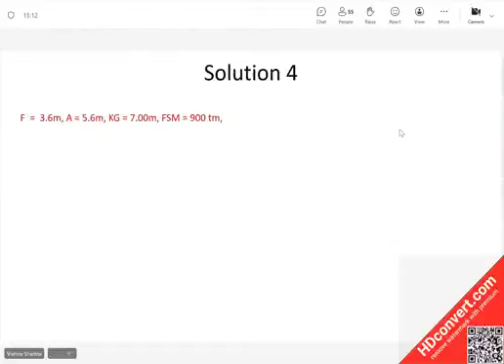Okay, so we'll first get the hydrostatic draft. We get it at 4.580. You can keep telling me the milestone results as we go.

Now, which particulars do we need to interpolate? Same particulars which were required in question number 3: W, TPC, LCF, and MCTC.

And we'll interpolate them. Why am I interpolating TPC? We used it in the last result, so I'm hoping it may be used in this question too. If it is not used, no issues, but be prepared that TPC may be required like we used in question number 3. So just to avoid going back to the tables if TPC is required, you can interpolate TPC and get the values. I'm sure all of you would have got these values, right?

Correct? Correct, sir. Yes, sir.

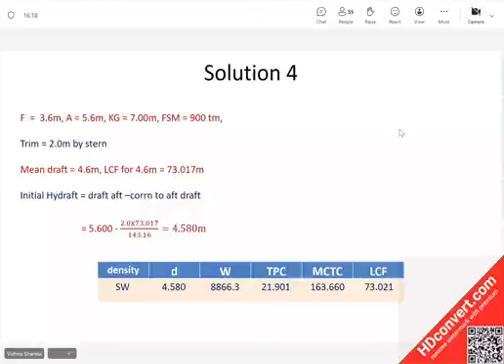Next, we will find out P at critical instant because we have to find draft at critical instant aft. So P at critical instant is 448.3 tons, correct? It's on display, am I right?

Correct. Yes, then we get W minus P and we get a draft of 4.375, right? This 4.375 in the table is the hydraft, the hydraft at critical instant. Now, since the vessel is on even keel, the trim is 0 at critical instant in this case. Therefore, draft aft shall also be 4.375.

What is our draft when the question is to be calculated? It is 4 meters aft. So that means the vessel will basically reach critical instant at a depth of 4.375 meters. Therefore, when the level drops any further to 4 meters, she is happily sitting on the blocks completely. Does everybody agree with it? Yes, sir. Okay.

So up to this time, the process was same as question number 3. But here the results are opposite to what you got in question number 3. In question number 3, you got the vessel within the critical period. In this one, you are getting the vessel outside the critical period.

Now, when the vessel is sitting overall... better mute, please. Mute, please.

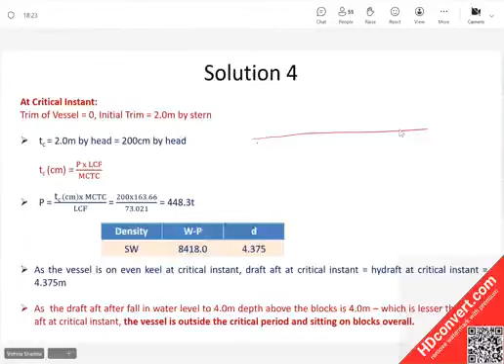So the vessel will be sitting at 4 meters on even keel condition. So the vessel would be sitting somewhat like this. Here are the blocks, and now the ship is sitting here on the blocks on even keel, and the depth of the water is now 4 meters.

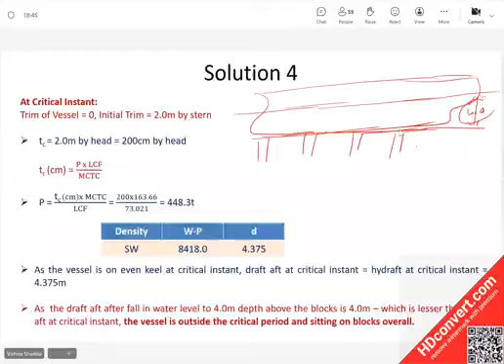At this point in time, you can get to know the buoyancy support, because this is the volume of water displaced. And if this is multiplied by density of the water it becomes the buoyancy, and that will be equal to displacement at 4 meters. Am I right? Yes or no? Displacement at 4 meters will be the buoyancy support to the vessel.

Please let me know if you have any problems comprehending it. Please let me know, class. The displacement at 4 meters picked up from the hydrostatic tables will be the buoyancy support available to the ship at that time. Yes or no? Am I right? Yes, sir, correct.

Because the draft is there, 4 meters, whatever displacement will be there. Now that is not the ship's displacement, mind you, but we are using that displacement to get the buoyancy support. And we know the displacement of the ship. Now, when we say displacement of the ship, in dry docking there will be only one displacement, and that is the actual displacement of the ship.

W will be used only for the ship's displacement. If you have to find this displacement, actually this will be W minus P, but if you don't agree it's W minus P, you can write it like this. But only W will be the displacement of the ship. Am I clear? Is that clear? Right, guys? Yes, so you know the displacement of the ship.

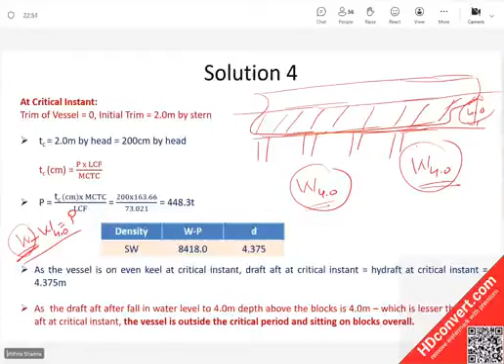Wow, wow, wow. If in a bucket you put a stone which goes and sits at the bottom, will it not displace any water? In a bucket, if you put a stone which goes and touches the bottom, will it not displace water? Is that what you're trying to say? Then everything has to displace—unless it is in vacuum, it has to displace the medium in which it exists. You and me are displacing the air in which we are sitting. And if 4 meters of the ship is submerged in the water, will that not displace the water?

Okay sir, I was thinking that she is sitting on the blocks and... No, so she is sitting. Is some part of the ship submerged in the water, yes or no? She is very much sitting. It is not that you are thinking wrong—you are thinking correctly, she is sitting on the blocks.

Now the stone is sitting on the bottom of the bucket—is the stone displacing water, yes or no? Tell me that. Yes, sir, yes.

So just sitting at the bottom, or sitting on the blocks, the ship is not displacing water if some part of it is submerged in the water, beta? Tell me, Inder. Yes, sir, she is displaced. Okay sir, how much?

What to what? Answer my question. No, to what draft is the vessel submerged in water? 4 meters, yes or no? 4 meters, yes sir. So she is submerged, that means that much water it will displace. Am I right? Yes sir, okay sir.

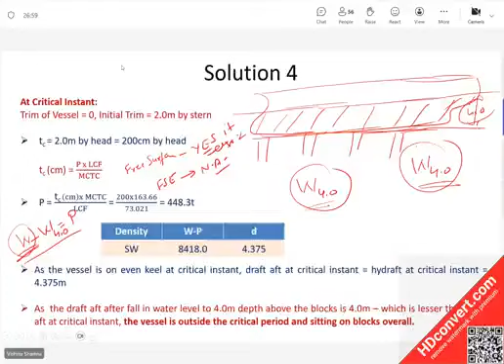This is only for explanation, we have done it yesterday. The hydrostatic draft of the vessel when the water level falls will be 4 meters above the block. Why? Because she is sitting on even keel, so hydrostatic draft will be the same as 4 meters.

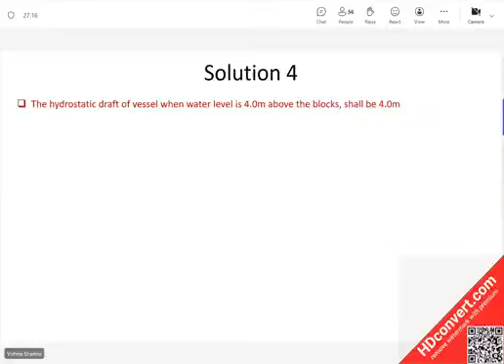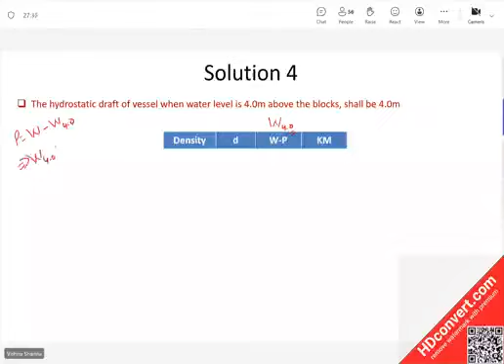So we get this displacement - this is displacement at 4 meters, you see. Or don't write only displacement, you can write W minus P, because your P is nothing but displacement minus displacement at 4 meters. This implies displacement at 4 meters is nothing but W minus P. Correct, beta? Am I right? And that is why this W minus P has been used here.

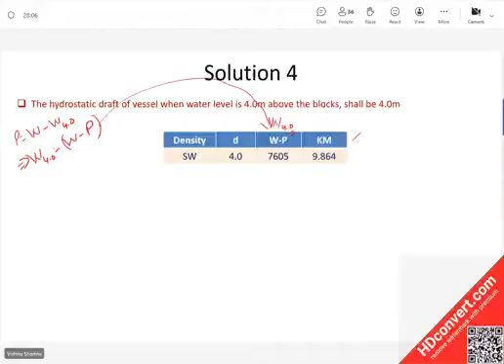Correct, beta? Understood? Yes sir. And yes, we'll need the KM for W minus P. So might as well, when you go to the hydrostatic particulars, get the KM also. At 4 meters, the displacement of the ship, which will be the buoyancy support, is 7605, which is W minus P. And KM is 9.864.

So we get the P of the vessel - don't use the word initial displacement, just use the word displacement of the ship and displacement at 4 meters, okay? There is nothing like initial displacement. Displacement of the ship does not actually change - it's a virtual change which is taking place, right? So just ignore this word here.

It's W minus W at 4 meters. So 1261.3 tons is the P here. And when you subtract 1261.3 from 8866.3, you'll again get 7605, which is W minus P. And once you get the KM, then you are good to get the final answer.

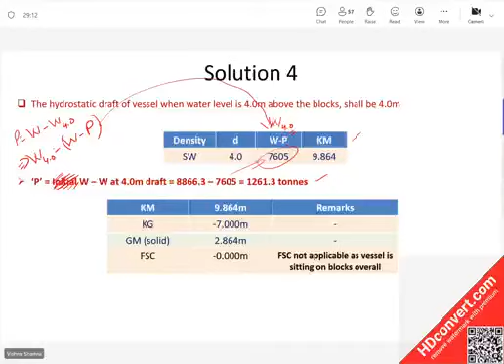KM for W minus P, KG 7 meters, GM solid 2.864. Don't remove free surface from the table, don't remove it. Free surface 0 - in remarks I have put FSC not applicable as the vessel is sitting on the blocks overall. GM fluid same as 2.864. Virtual loss: P into KG upon W minus P, and we get the virtual GM of 1.703.

Please have a good look at this question. Do it by yourself, let me know if anything is still not clicking with you. I give you another 2 minutes now to absorb this, understand this. Hold your doubts for 2 minutes so that others are not distracted. 2 minutes down the line, I'll ask you if there are any doubts and I'll address them.

Since you had already done up to that point, this is the last part you have to do, that's all.

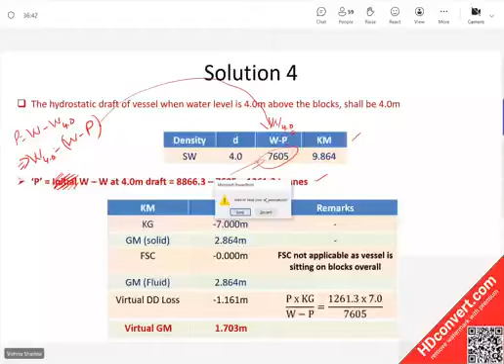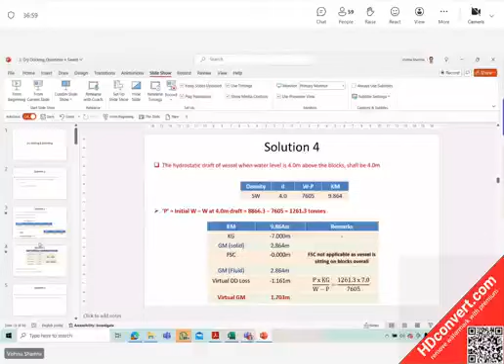Sir, in place of initial, what we can write, sir? Displacement of the ship. W, yeah, W is the displacement of the ship. There is nothing like initial and final. There is no change in actual displacement, na? Or is there a change? No, there is no change, sir.

So I've been calling it a ship's displacement so many times. W is the ship's displacement, right? Yes, sir. Okay, right. If you call it initial also, nothing wrong, but unnecessarily it will confuse you.

Then what is the final displacement? Did we discharge? Did we load? No, yeah, final is also the same. It's a virtual discharge, right?

P is virtually discharged. Guys, question number 2 is opposite to what we have been doing in question number 1, 3, and 4. In question 1, 3, and 4, we knew the trim of the ship at the time of entry, and we were wanting to find out the virtual GM. In question number 1, it was found at the critical instant. Question number 3 and 4 at different points.

But in question number 2, if you read here, he says MV Hindship at a displacement of 13383 tons, 7.7 meters, FSM 1000 ton meter. What is the maximum trim by stern with which she may enter a seawater dry dock if the virtual GM at critical instant is not to be less than 0.4?

So now in this case, instead of calculating the virtual GM, you are saying, no, you don't want the virtual GM to go less than 0.4 meters. And therefore, we all know that virtual loss of GM depends on P, and at critical instant, P depends on the trim with which the ship enters. So he's asking, what is the maximum trim with which the ship may enter the dry dock?

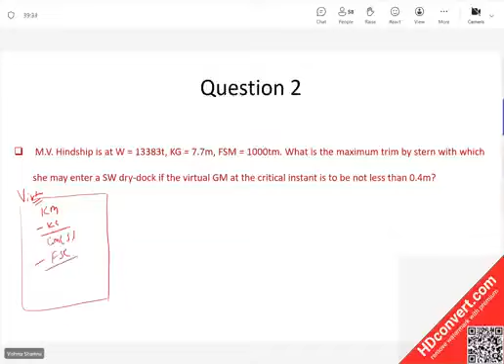Now, in this question, if you see, guys, we don't want the GM at critical instant to go less than 0.4. Now, if you recall the table that we were making for finding the virtual GM, we were writing Km minus Kg, GM solid, FSC, GM fluid, virtual loss, and virtual GM. Correct? Why? These were the steps we were following in the table. Am I right? Yes, sir.

So now, how many corrections are involved from GM solid to virtual GM? Look at the table. Corrections? Yeah, FSC and virtual loss. So there are two corrections involved from the GM solid to virtual. One correction is this one, the other correction is this one.

Okay, now I don't want this virtual GM. I want it to be either greater than or equal to 0.4. That means I'll work for 0.4, right? Anything more than that is welcome. So we don't want this to be less than 0.4, so I will work it for equal to 0.4. Okay, so I want to know how much should be the maximum trim of the ship.

And this depends on P. This also depends on P. FSM is of course given. So if this has to be not less than 0.4, then what I should know is how much is the GM solid, so that I know how much can I afford to lose because of two corrections which depend on P. Kg does not depend on P.

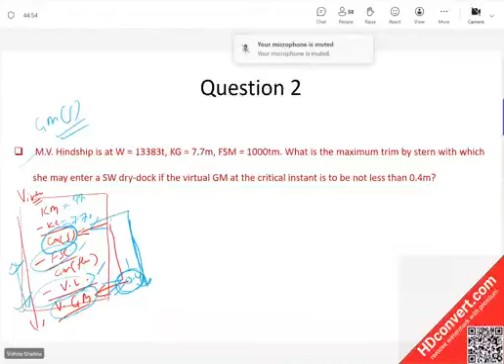Yes or no? In physics and science, many a times it happens that when we cannot get the exact value to be used, we use the best available value. That means best available value does not mean that it is the correct value. Best available value is whatever best you can logically get.

So here, against all my wishes, I will have to use the Km for W instead of W minus P. And this is why I did not want to do this question at number 2, because then there would have been doubts in the minds that sometimes you're using Km for W, sometimes for W minus P. Km is to be ideally, logically, technically, always used for W minus P. Here, against all my wishes, because I cannot have any other reference, I'll be forced to use Km for W. Understood, guys? Is that clear?

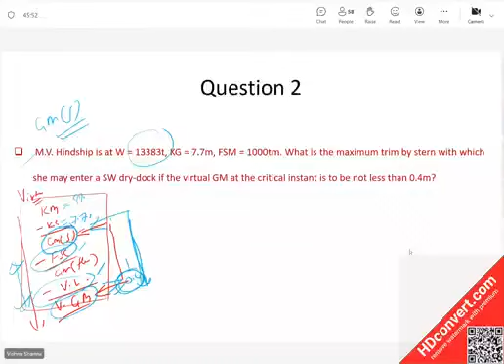Is that clear, beta? Sir, please repeat the last statement, sir. Please repeat. You repeat whatever I said. I'll complete it. Sir, I could hear until when Km we don't know, so we will use the best available means. Very good, fantastic, continue. You are right on track. Bolo, after this my connection distorted, sir.

Nothing. So what is the best possible Km you can get here? Because you don't have a clue about P, the only compromise you can make is use the Km for W, right? That's the best possible thing I can do. Yes sir, correct. And I said this method is not only used here, it's also used in science.

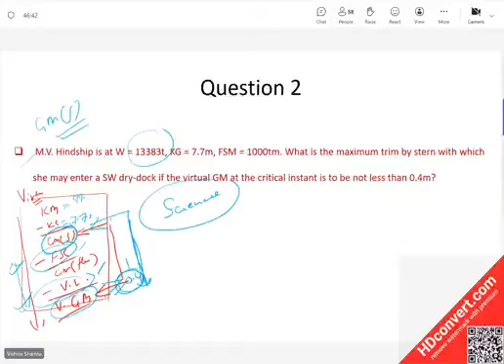And this process is called iteration in science.

You use the process of iteration to improve the results. In science, when you need a high degree of accuracy, you do the first iteration and get an improved result, then a second iteration for further improvement, and a third iteration to improve further still. Depending on the degree of accuracy needed, you can continue doing iterations as many times as required in a scientific process.

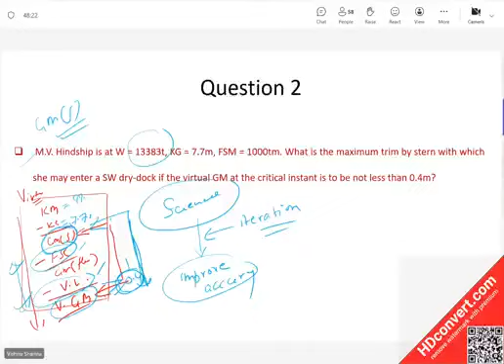In stability also, we will use the process of iteration, but we will not keep repeating it because we don't have that luxury of time, and the accuracy required will not be of that order. We will use one iteration, a single step iteration. Have you understood, have you got the overview of what I'm talking about? Yes, clear sir.

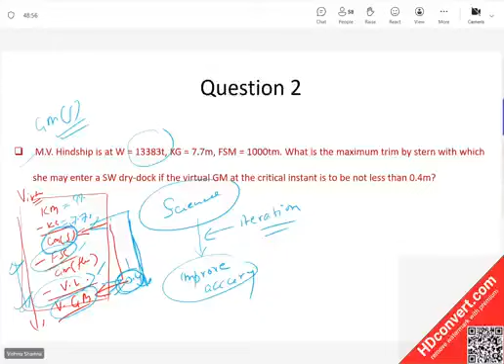Okay, go to hydrostatic particulars and get the particulars of the ship. It's a listed displacement. You'll need Km to start with, and you'll also need LCF and MCTC eventually, so those things you can calculate. So get all this: displacement, draft, MCTC, LCF, and KM.

It's a listed value, so I'll not waste time on it. It has been kept simple because we are not practicing interpolation now, we are focusing on drydocking. So this Km, 8.304 Km, is not for W minus P, it is for W. Understood, guys?

Yes sir. So what will happen? I'll start with this Km. What is my kg? 7.7. This gives me the GM solid of 0.604, right guys? Yes or no?

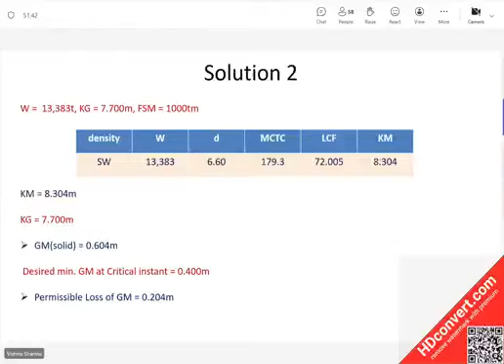Yes. Look at this thing that I worked out in pen earlier. What were the corrections applicable from GM solid to virtual GM? FSC and virtual loss.

What is the formula for FSC? It is FSM divided by displacement minus P, that is W minus P.

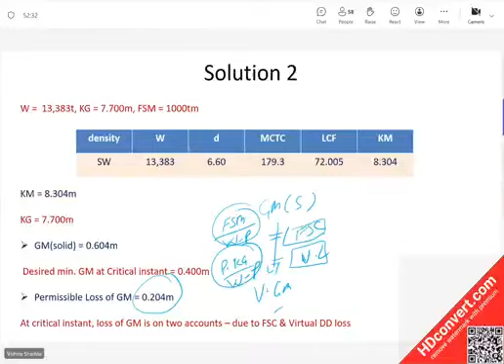So at the critical instant, loss of GM is on two accounts: due to FSC, and the virtual loss. You don't have to write all this. The permissible loss of 0.204 will be the sum total of loss because of FSC and the virtual loss.

What is FSC equal to? FSM upon W minus P, and P into kg upon W minus P. I know the FSM, I know the displacement of the ship, I know the kg of the ship. What I do not know on the right side is only P. Am I right? Am I right?

And on the left side, we know it is 0.204. Does everybody agree now? Can you solve it for P and be sure that you get a P of 218.9? Please calculate.

And then if you have any questions... is the FSC question answered for you? Yes sir. Yes sir.

13383, is that what you got? That's fine beta. If you're getting 218.9, good. If somebody is having a problem, let me know. Whichever way you got it, as long as you're able to get the answer, it's fine.

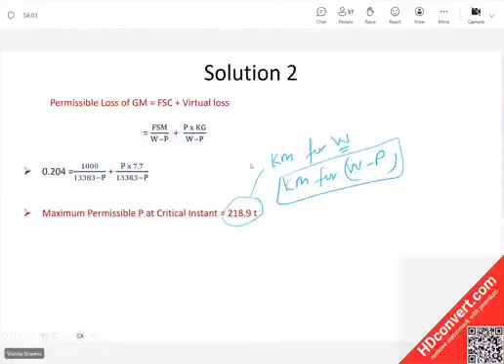P obtained above is by taking Km for W and not W minus P. To improve upon the result, single iteration is recommended.

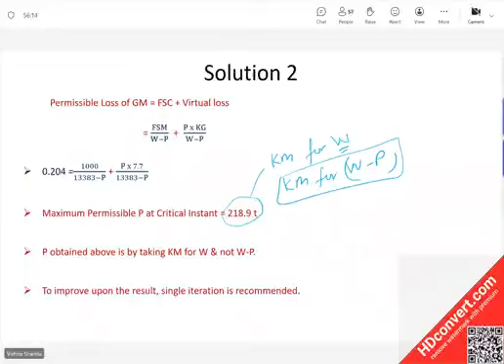Now W is equal to so much. Now we find W minus P. That means this W minus P that we obtained just now, and for this W minus P, please interpolate Km and see that you're getting the Km correct, beta. Yes or no?

Let me know once you've got the Km, beta, I can continue then. Yes sir, they are good. Okay. Now we'll use this Km because this is an improved Km. I'm not saying this is again accurate Km, no, but this is better than what you used earlier. So now we'll again get GM solid and repeat the full process.

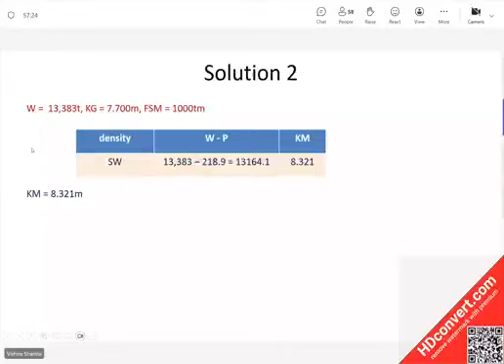So now the permissible loss of GM is 0.221. Can you please calculate the P after the iteration, the same way as we calculated a while back, before I show it to you?

During first iteration, which W do I have to take? The initial. How many W's do you have? There is only one W in our question. I've told at least five times in the class, there is only one W in the drydocking process. Guys, have I told it umpteen number of times now? Why is this question coming? Which W? There is only one W to be used. W is to be used only for one value, right? Yes or no, guys?

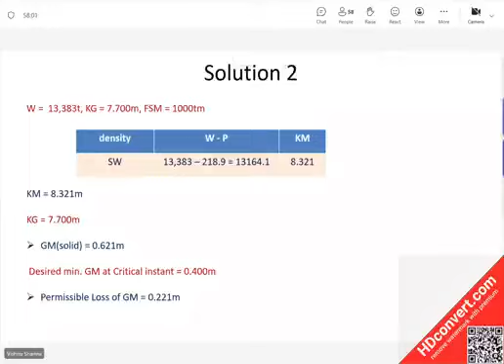Hello, how much is the P? 47.2? Okay, 247.1 tons. Yes sir, 247.1.

Guys, let me know if you have a concern. If more accuracy was required, we will use this P, find the KM again and repeat. That will be more accurate.

You can repeat it once again, and every time the difference between the P that you already have and the new P will keep reducing. That means eventually you will go to a stage where the calculations will stop changing the value of P. You will zero in on the accurate value if you continue the iteration process, but we shall not be doing it because we don't have that much time, nor is that high degree of accuracy required. So single iteration for us is good enough. Is that clear, beta?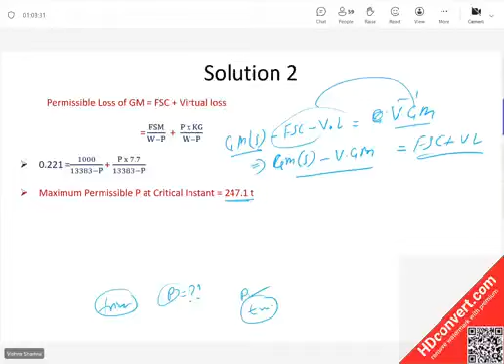And what does P depend on at critical instant? P depends on the initial trim of the ship. Correct? At critical instant, the change in trim is equal to P into LCF upon MCTC. And what is the change in trim at critical instant? It is equal to the initial trim. So whatever is the maximum trim change permitted, that is the maximum trim with which the ship can enter.

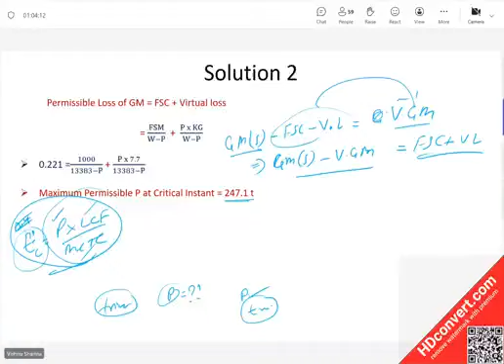Now in this case, this value is given to you. No, sorry, this value is not given to you, this value is to be found. P you have calculated, LCF you know, MCTC you know. You can put this value and you can get the maximum trim.

Let me clear all this that I have written here and then show you. These are the values which we had initially picked up against the displacement of the ship. And now, what will be the maximum trim for this P at critical instant of 247.1? Maximum trim will be P into LCF upon MCTC.

Don't worry, I'll answer this question. Some of you may say, why this LCF or why this MCTC? And we get this trim of 0.992 meters by stern. So the maximum trim with which the vessel can enter the dry dock is 0.992 meters by stern, if she does not want her virtual GM at critical instant to go below 0.4 meters. Please see it, understand it, let me know if there is an issue.

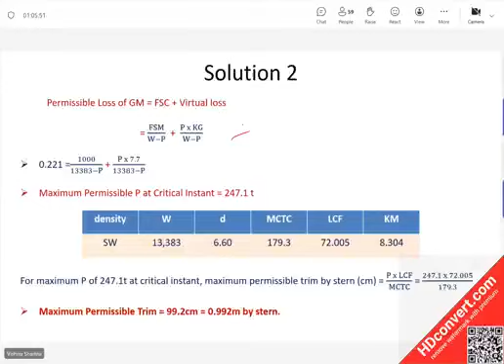In question number 1, you had the trim, you were finding P, am I right? Which particulars did you use in question number 1? Correct. Now in this question, the same formula is being put to use. You tell me what could be the reason for the change. It was the same formula which you used in question number 1. Only thing is, in question number 1, this was known, this was to be found. Now this is known, this is to be found. Correct? So if I reverse question number 1 with W minus P particulars, will the answer come same? No. Correct, beta?

So basically, there is no need to change. Now I'll tell you how to resolve this issue in your mind once for all. Which particulars to use? Now here, if you use particulars for W minus P, they will also yield error. If you use particulars for W, they will also yield errors. Why? Because you are picking up particulars against a certain draft and then you are assuming them to be constant throughout the range of the question.

Correct, beta? Yes, sir. So the moment you assume the particulars remaining constant, that is going to result into some error, whether you take it for W or you take it for W minus P. None of them can be claimed to be absolutely correct, because you are converting this question into a fixed particular question despite the hydrostatic tables being available. Correct, beta? Okay, sir.

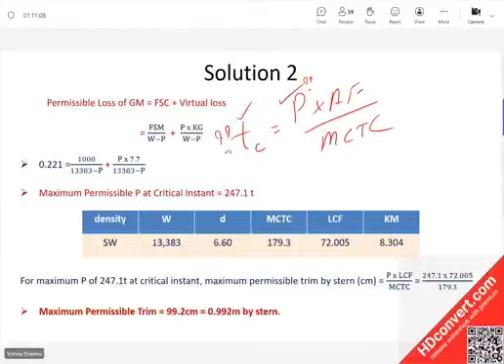Is it clear? Question number 2 clear? Okay, if you have any doubts coming to your mind, let me know. So we are done with question number 1, 2, 3, and 4. Now, guys, what is the difference in this question? Tell me.

First, we have to find the draft in fresh water, sir. No, what is the difference? Identify the difference in the question. Fresh water density, sir - only the density changes, correct? So that means the dry docking working will be the same. Only thing is, the particulars have to be used correctly. Am I right?

And how do we get the particulars in the correct density? We discussed it in the first class - those four scenarios: draft given in seawater, displacement given in seawater, draft given in non-seawater conditions, and displacement given in non-seawater conditions. You remember that, guys? Correct? Am I right? Okay, so the dry docking process will remain the same as you learned in question number 1. Only thing is you have to make sure correct particulars are used.

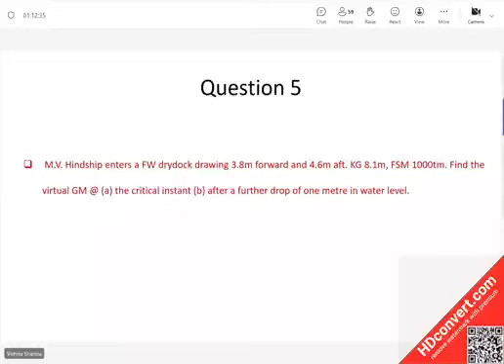So can you please get the hydraft of this ship? This is in fresh water, please remember. Can you get the hydraft? Get the hydraft, please. 4.580. Okay, I'll show you in a while. Can somebody validate, please write it down.

Is he right, guys? 4.580? Sorry. 4.191, sir. Sorry, sir. 4.191. Okay, 4.191, is it? Yes, sir. Okay, 4.191 is the corrected value from him now. Can you validate? 4.191, sir. Okay, very good. Okay, others?

Guys, see, I told you something on day 1. Speed up with the interpolation. If calculation of hydraft is creating a time difference of 20-30 seconds between the first person in the class and the person taking more time, imagine this 30 seconds during interpolation and draft. If you keep adding this because of interpolation and stability required, this will total to a good 10 to 15 minutes difference. So you can't take your interpolation speed lightly. Accuracy, of course, nobody can take lightly, but at the same time, please value the speed also.

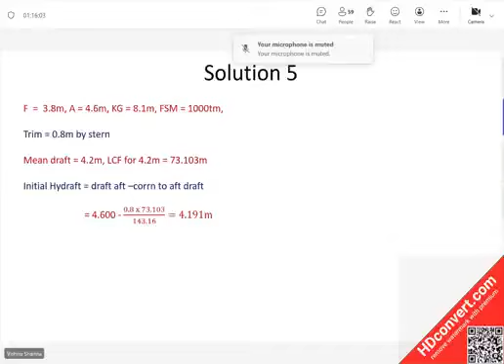Guys, here you have a draft given in non-seawater conditions, correct? Yes or no? A draft of 4.191 in fresh water, correct? How do we get the particulars? Tell me now.

How do you change the draft? I have never learned it here. Would you like to learn it? We take displacement - the system will calculate the displacement for seawater, then we'll do displacement in seawater by density in seawater into density in groundwater.

One statement I expected was, we'll get the seawater particulars for 4.191. Is that correct? Correct, sir. Yes, sir, correct. Why can't you talk - when you talk to yourself also, why can't you talk to yourself crisply and in a technically correct language? That means I have to get the seawater particulars for 4.191, and then we need to get the particulars for 4.191 in fresh water. Am I right?

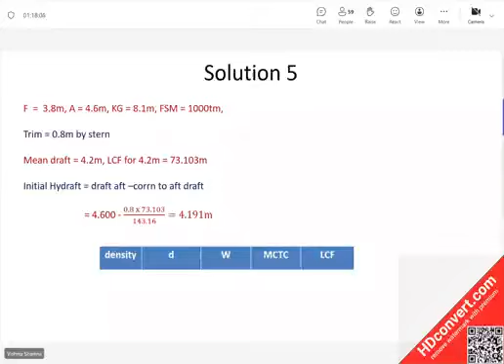When you enter the tables, you'll get the particulars for seawater. Can you please interpolate and confirm? Confirm, sir. Okay. Then get in the next row, just below it, change the density to fresh water, keep the draft 4.191, and get the particulars. I thought I'll not have to waste time on this issue today. So displacement 7822.9. Okay.

See, guys, everything we are using, I have covered it up, and I have not left it to chance that somebody may know, somebody may not know. Now, if you do not know, then it's purely your lack of interest or lack of effort. I could have understood if I had not explained to you. I could have understood if this was the first time it came and some of you were lost. I could have taken that. But having invested one full session in the beginning, and today, if you are going in circles, then there is a problem.

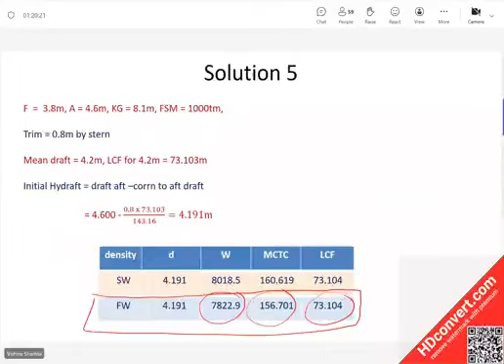So here you can see it's 171.5, right? Is everybody getting 171.5 tons P? Yes or no? I'm still calculating, sir. Calculate. Let me know once you're done.

Yes, sir, 171.5. Okay, fine. Now, guys, what do we need? Question says virtual GM at critical instant. What do we need now for that? Say again. W minus P. What for? W minus P.

Okay, what is the ship's displacement? Tell me from the screen. 7822.9. And what is the P? 171.5, right? You need displacement KM for this. Am I right? Yes or no? Yes. Correct?

Yes, but with this W minus P, where is the ship going to be? In which density? For freshwater, sir. Freshwater. This will be W minus P in freshwater, correct? Correct, sir. So you have to get KM per freshwater, right? Yes, sir.

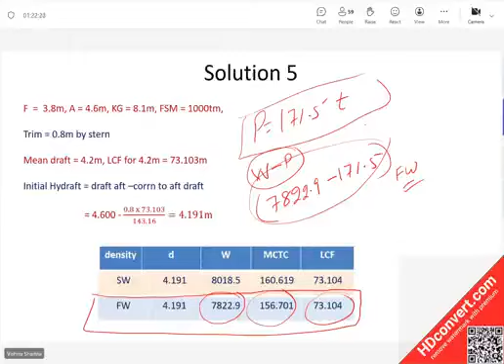So now which situation, 1, 2, 3, 4, which category does it fall into? You know the displacement in non-seawater conditions, right? 4. Yes, 4. So now you'll have to get the equivalent seawater displacement. Correct. Then we'll go and find the KM. 7842.7, you can see it here. Up to this you did. Then W minus P in freshwater is so much.

Now this has nothing to do with dry docking. What we are now doing is nothing to do with dry docking. You know the dry docking process. The problem if you're facing, it's facing because of the fundamentals. So don't think dry docking is complicated.

And this will be the equivalent seawater displacement. Once you get equivalent seawater displacement, what do you do? You will enter the tables with equivalent seawater displacement and get the particulars and then convert them to the required density of fresh water. Correct, but you remember that part? Yes or no?

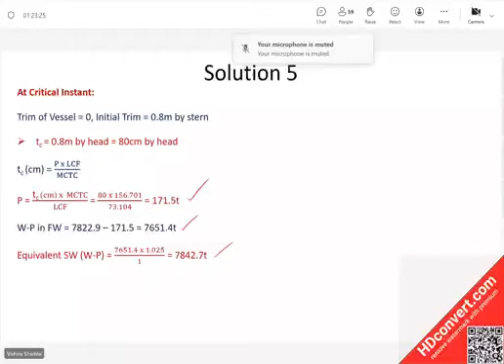Yes, sir. So for part A, we need KM. Also get the draft for part B, because part B says, oh sorry, when the level falls by 1 meter, so get the draft at critical instant also. Now calculate this then. Okay.

First you will get it for seawater, then you will get it for fresh water. So draft is 4.110. Okay. Get the KM also. 9.725.

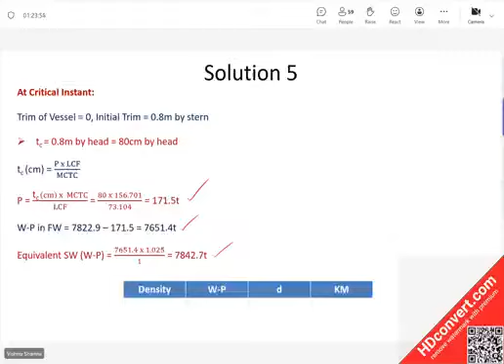But these values are for seawater. We need it for fresh water.

Excuse me here, I don't know why it has happened. Is it the presentation? I'm just muting mine. Give me a second, guys.

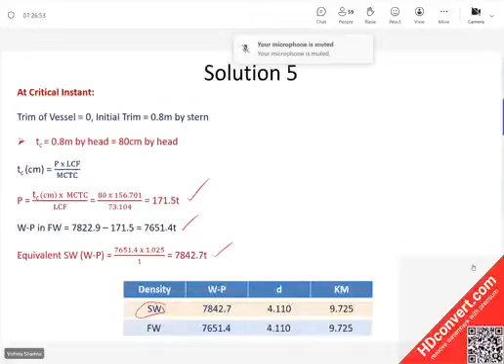Okay guys, I hope it's clear so far. Sorry, I took a break. Yes, sir. Okay, now using this KM, which KM? They may be same values, but always learn the right practice. Using which KM? Using this KM for fresh water.

Can you find out the virtual GM? That is the answer for the first part, beta. How much is it? 1.3? 1.312, 1.2 meters, okay. So if two people are saying, it must be correct.

So guys, if you have a problem with the conversion of particulars, please pay attention to the basics. Don't allow your hard work, your effort in dry docking grounding to go down the drain because somebody has changed the density in the question. That's why I'm bringing in this variety of questions so that whatever possibly they can bother you with is all automatically covered here. There's no point in doing 20 questions of the same type. You do 20, you do 50, unless you learn and do them, it's not going to be of help. You can't be mugging up every question.

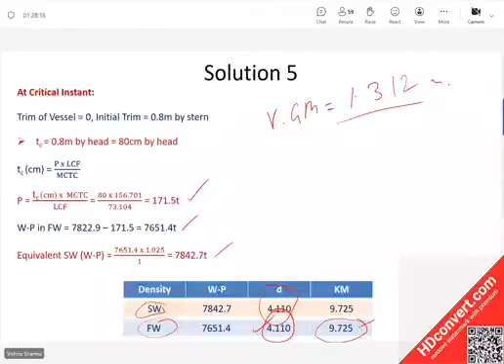So also remember, this is the draft in fresh water at critical instant. So at critical instant, the GM is 1.312 meters, right guys? Correct? Yes. Now, any questions up to part A, beta? Part A answer is this one.

Okay, then the second part is to find the virtual GM when the level falls 1 meter after the critical instant. That's why we got the draft at critical instant.

Draft at critical instant was 4.110 meters. Am I right? Have I taken the correct value? Yes, sir.

For part B, he wants further fall of 1 meter. So that means depth of the water, or the draft of the ship, is 3.110, because now the vessel will remain even keel. She's sitting on the blocks completely.

Am I right, guys? Yes, sir. Correct. Now for part B, how do you think we will be able to get the P, guys?

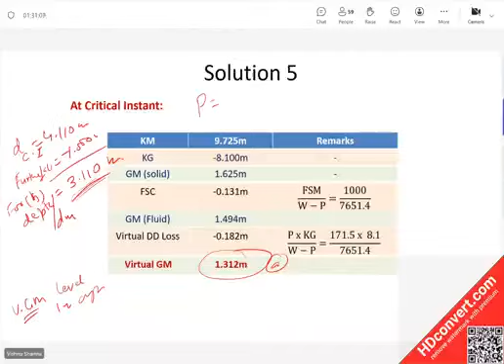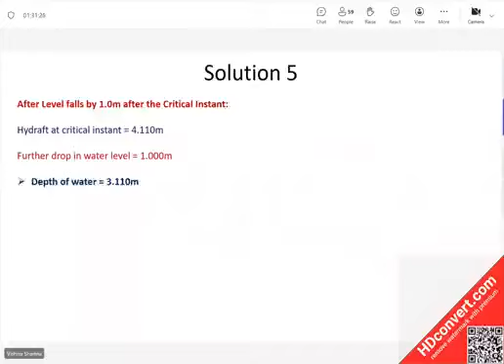Guys, I explain before showing the slides so that when you go to the slides it makes better sense. After the level falls by 1 meter after the critical instant, draft at critical instant is 4.110, further fall 1 meter. So the depth of the water for part B is 3.110, which is also equal to the draft for part B.

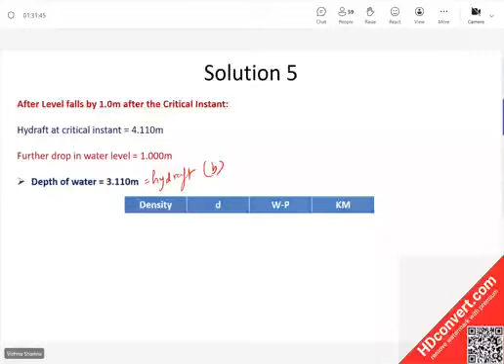Now, density: when you enter with 3.110 into the hydrostatic particulars, you will get it in which density? Seawater. Right? So for 3.110, this is the displacement in seawater, and this is the Km. But my vessel at 3.110 is not in seawater.

My vessel is in fresh water. So in fresh water at 3.110, this will be the displacement, which is W minus P. Km will remain same. So these are the particulars to be used hereafter. Am I right?

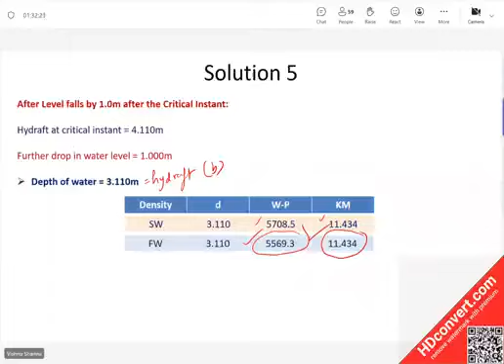Clear, class? Yes, sir. There seems to be something missing, suddenly people seem to have lost out. Is it okay? Okay, sir.

So now how do we get P? The displacement of the ship minus W minus P, that is W at 3.110 in fresh water. So the upthrust will be, in fresh water, displacement of the ship minus displacement at 3.110 in fresh water.

We can put these values and we get a P of 2,253.6 tons. Please check this and see.

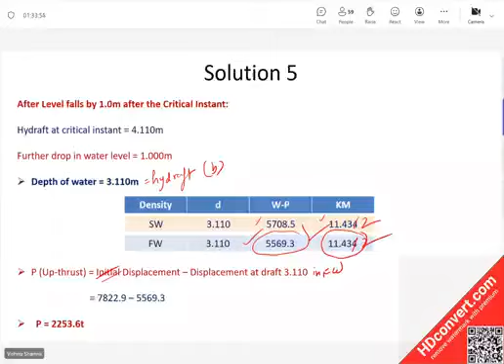So we have got P for part B now. This is part B we are solving, but part A was already closed out. Now, once we have P and we have the Km, then we'll get the virtual GM.

It will be Km minus Kg, but is the vessel within the critical period or outside the critical period for part B, guys? Outside. What will happen to FSC? Not applicable, not applicable. Please do that and find the value.

Find the value of virtual GM. 3.278.

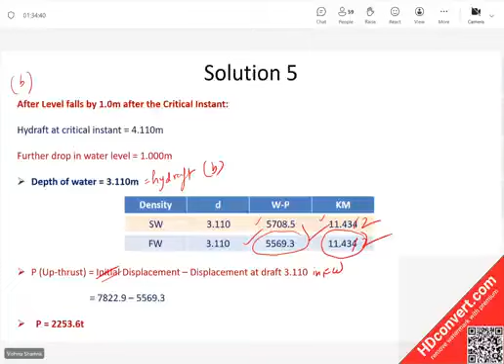Since I started with 434, there may be a loss, so yours will then be 0.054. Am I right? Yes, sir, 0.05. Because I started with 4, if I make it 2, this will reduce by 2 here.

So guys, if question 5 is bothering you, why is it bothering you? It is bothering you because you are struggling with the particulars in different densities. Through this question, what was my intent? My intent was to make you realize that once we had the draft in different densities, we had to use the method for the third condition.

When it came to Km, we had to use the displacement in fresh water, so we used the fourth condition. So the third and fourth conditions have been revisited here, and that was the intent.

Now, if you are struggling with that, you are the best person to figure it out, and you are the best person to put in effort and put that issue to rest, because that has nothing to do with dry docking or grounding. It has all got to do with the basic issue.

If this was a seawater question, I'm sure none of you would have got stuck. Am I right, guys? If in question number 5 I replace fresh water with seawater, I think everybody would have run away with the question. Am I right?

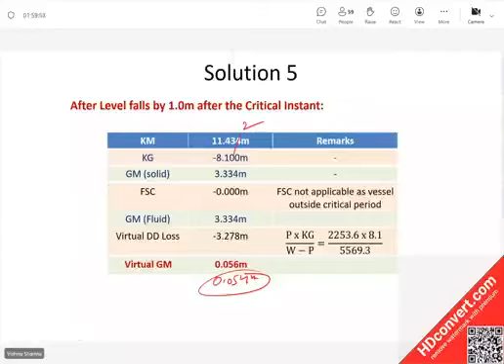Okay guys, sorry, any problems, doubts up to question number 5? Class, any doubts? No sir, no doubt. No sir. Okay, so yeah, so now you have this.

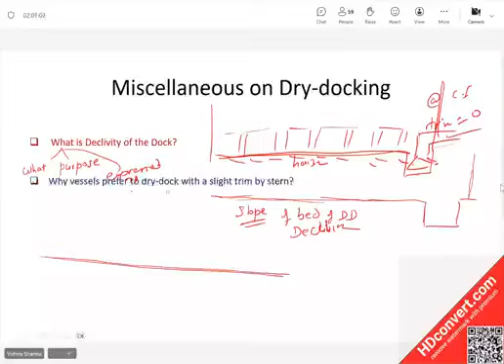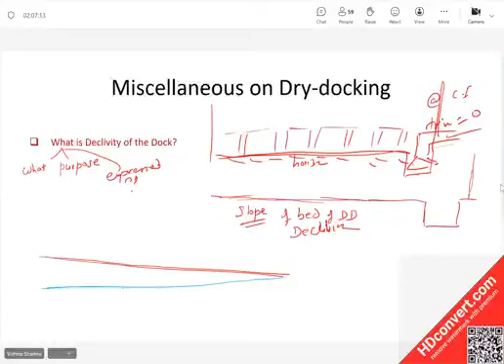Now, if this is the bottom of the dock, this is the slopey one, and let me draw the horizontal line below this. So what happens? Here both are meeting. Now the slope is expressed as, you see, if you see at this level, this is the difference in heights. At this level too, this is the difference in heights. That means starting from the point of starting, that is x.

So the declivity is expressed like so many centimeters per 100 meters. That means if from here to here it is 100 meters of length, and the difference in height is x centimeters, then the declivity is x centimeters per 100 meters of length.

Have you understood how declivity is expressed, or any questions, guys? Clear, beta? Yes, sir.

Now, on this slopy bed, if I put the blocks of the same height, what will happen? The top of the blocks will not be horizontal. That will also have a slope. Am I right? Correct? Yes or no?

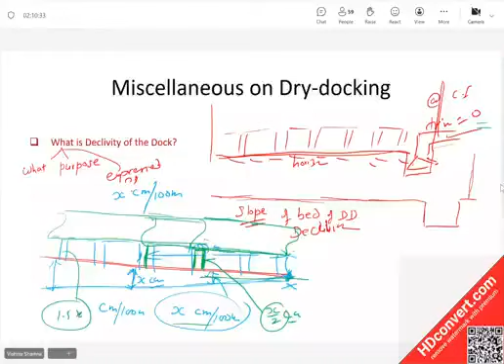Am I clear, class? Yes, sir. So firstly, what is declivity? Declivity is the slope of the bed or floor of the dry dock. What is its purpose? To facilitate drainage of the last remains of water. How is it expressed? It is expressed as the height of the sloped floor per 100 meters of length.

What is its effect? Its effect is that the ship is not even keel when she sits on the blocks. She will have a trim which will depend on the declivity and the length. So the trim at critical instant or after that will depend on how much is the declivity and how much is the length of the vessel. Why? Because declivity is given every 100 meters, so depending on the length of the vessel, she will have some trim when she sits overall.

Is the declivity component clear to everybody? Anybody has any questions? Please let me know. This comes in theory also at times besides the numericals, right? So if it comes in theory, you should not be just writing rubbish, you should be technically expressing it the right way. So if anybody has any problems, let me know.

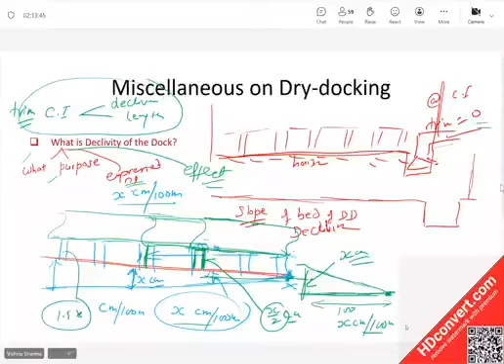The declivity part I've explained to you now. Okay, let's go to the next term. As I promised, I'll be covering the theory related to the topic as we run through it. This question comes in theory.

Why do vessels prefer to dry dock with slight trim by stern? You will answer this question in two parts: one, why trimmed by stern, and second, why slight and not excessive.

Why you want to dry dock the ship trimmed by stern: if she dry docks trimmed by stern, then the first point of contact is the stern frame, and this stern frame is specially strengthened during ship construction to withstand dry docking stresses.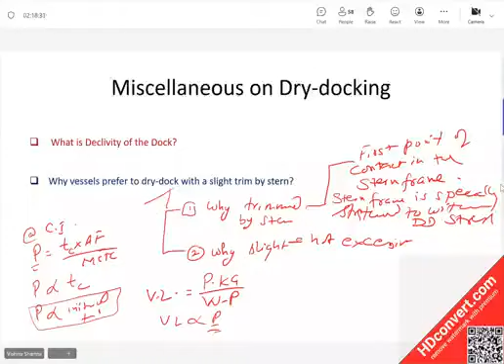So if this comes in theory, don't write stupid things. Be very technical, be very specific, as mathematical with formulae as possible. Don't start writing 100 pages without any content. Is this question also clear, guys? I'm clearing the screen then.

The last formula, I'm not very interested in, but if somebody wants to use it, here is the other formula. As I said, this is based on the fact that P is not a virtual discharge. P is supplementary or additional, or is additional buoyancy, which supports W minus P. So the weight of the vessel remains W only, because there is no virtual discharge. So I don't think many of you would like to use this formula.

It is just mentioned here for the sake of closing out the issue. So these two theory questions - there are three theory questions I have covered for dry docking. Critical period, critical instant - why is it called critical instant? Why is it called critical period? What are they? So 1, 2, and 3. Three theory questions on dry docking I have addressed. Correct, Peter? Yes or no? Yes, sir. Okay, now we will take a question in which we'll have the declivity and we'll have fixed particulars.

So guys, in MMD exams, you'll have two types of questions - one based on MV hinship or fixed particulars. We have done 5 questions involving MV hinship. You should actually practice them more. Why? Because fixed particular is always simpler - you don't have to take out the particulars, they are available to you in the question. Okay, so fixed particular questions also do come in the exam, but you will not have any problem.

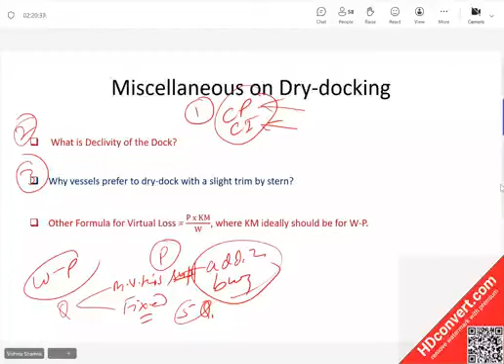So I'll now take a question where we'll have declivity and we'll also have the fixed particulars addressed in the question. Here is the question, guys.

A ship of length 150 meters, displacement 5,200 tons, center of flotation 2 meters aft. So if center of flotation is 2 meters aft, then LCF will be 73 meters, 75 minus 2. MCTC 140 ton meter, KM 6.5, kg 6 meters.

So you don't have to worry about KM for W and W minus P - there is only one KM. Then you will have TPC, FSM given, draft forward and after given, which is to be dry-docked. Calculate the residual GM and drafts forward and after. So GM plus draft at critical instant.

If the dock has a declivity of 30 centimeters per 100 meters - now, guys, look at the declivity given and look at the length of the ship. What do you think will be the trim of the ship when she sits on the blocks completely? What do you think will be the trim?

45 centimeters. Is that a complete answer? Please give a complete answer. By stern. 45 centimeters by stern, correct? So when the trim of the ship reduces to 0.45 meters by stern, the vessel will reach critical instant, correct? Unlike the previous cases where reaching critical instant was when the trim was becoming zero. Am I right, guys? Yes or no? Yes. Clear?

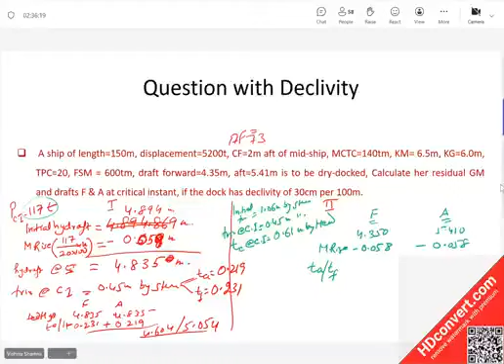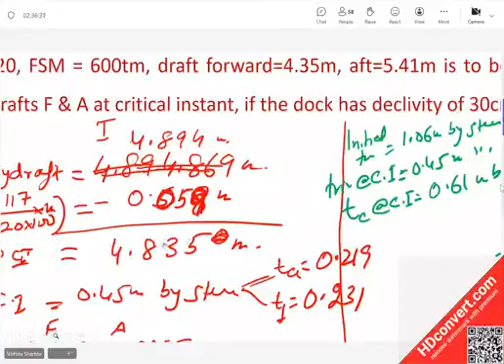Does everybody agree with this? So here also we wrote TATF. Here also I'm writing TATF. But I'll go back. What has happened to it? Why is it? Okay, it's coming. I've written TATF here. I've written TATF on the right side also, but in the red one, it was TATF of the trim at critical instant. In the green one, we are saying it's TATF of trim change.

So can you please find TATF of 0.61, beta? What is TA equal to? 0.297. TF and TA, and TF will be how much then? 0.313. Does everybody agree with this TATF split of TC, beta? Yes or no? Yes sir.

Now this gets applied to the after draft, you will have 0.297. To the forward draft, you will have 0.313. And mind you, the trim change is by head. If the trim change is by head, the TF component will be added and TA component will be subtracted, and you will get the same draft: 4.604 and 5.054. Sometimes in the third decimal place there may be one shift up or down because of rounding off. Otherwise, fundamentally, they are both same answers.

Have you understood both methods? I have done it earlier also, and I've done it again. So when it is required to be redone, please don't struggle with it. Somebody who was talking about in the red one TATF of 0.61, is it now clear to you, beta? When will the TATF of TC come? Understood sir. Okay, yes sir, understood.

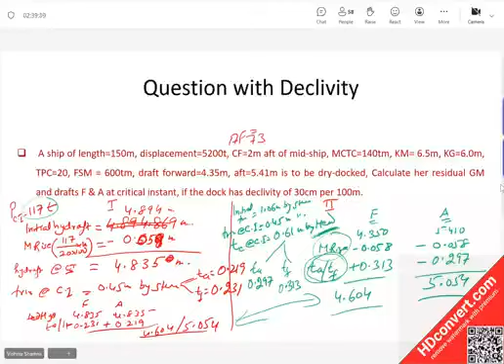Clear? Yes, sir. Okay, I'll take you through the solution. You know it now, there's nothing much to explain here.

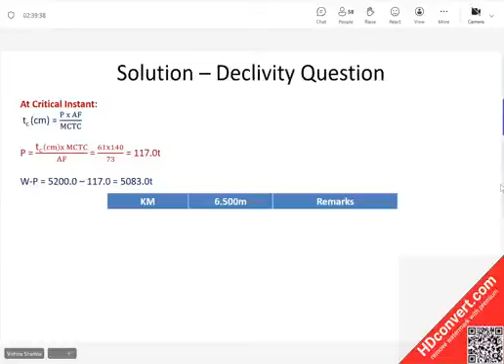Declivity is so much. Trim change at critical instant is 0.61 meters by head. This you already know, you've already calculated it, so I don't want to waste time. At critical instant, P is 117. W minus P will be so much. And now we can have the GM calculation, and GM comes to 0.244.

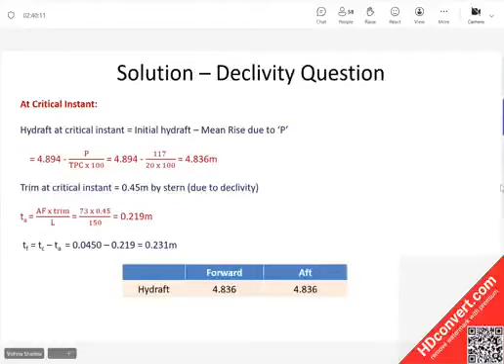I'm sure all of you have done this, so there's nothing much. Then calculation of draft, you can do it either way. I have done it the first way, so the hydraft will be 4.836 at critical instant. Trim at critical instant is 0.45 meters by stern, that is due to declivity of the dock. TA will be so much, TF will be so much, and the drafts would be so much. Correct, beta? Am I right?

Yes, sir. If somebody is getting the draft the other way, it's also okay, no problem. That's up to you which one you want to use.

So guys, through this question, what have I tried introducing? How to factor in declivity and how to handle a question where the particulars are fixed. And I'm sure you'll agree that if you happen to get a fixed particular question in the exam, you should consider yourself fortunate because that relieves you of hassles of interpolating the hydrostatic particulars, right?

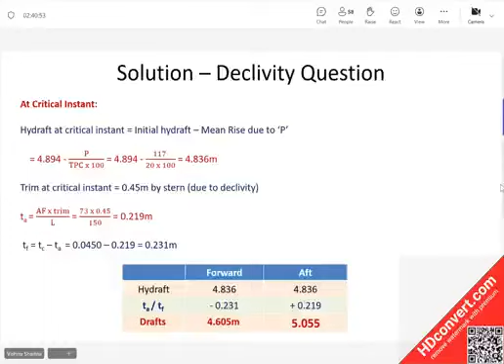Yes, sir. Now, what is the time now, guys? 12, 12, sir. 12:10. Okay.

Can you please take down this question and tomorrow come with the answer to this question? It's a trim question, nothing to do with dry dock. Don't confuse yourself.

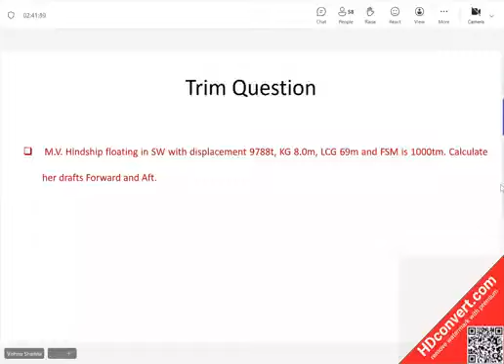MV Hindship is floating in seawater with a displacement of so much, KG so much, LCG so much, FSM so much. Calculate her drafts forward and aft. So what will you do? You'll get the hydrostatic draft for 9788. You'll calculate the trim, split the trim into TA and TF, and then apply it to get the drafts forward and aft. So you'll be calculating the trim and then the forward and aft drafts.

Guys, it's a simple trim problem. Would you be able to do it? I'm giving it to you with a purpose, it's not out of context. This will also help you in revising your MV Hindship trim problems, right? At least the basic part of it. So please do it, tomorrow I'll be asking you the results of it and then we'll continue.

So tomorrow we'll first finish the trim questions, complete the trim issue. And once we finish the trim issues, we'll move on to grounding.

Again, what should you do? Maybe a question in your minds, should you start testing yourself by doing questions from past papers? Don't bother right now. Right now you have these 6-7 questions that we have done. These 6-7 questions you must understand and should be completely convinced that you have understood them and are able to solve them. Second, complete this question and get the trick.

Okay, tomorrow and day after tomorrow. Day after tomorrow means the next class. If it is Monday, it's fine, if it is some other day, okay, so whenever we have the next class.

So when we have the next class, I'll basically be taking you through grounding in the next 2 sessions. Hopefully in the next 2 classes, we'll finish with dry docking and grounding. Then I'll give you some assignments from the past MMD papers, you'll solve them and get back to the class with doubts. Okay, so that is what the process would be.